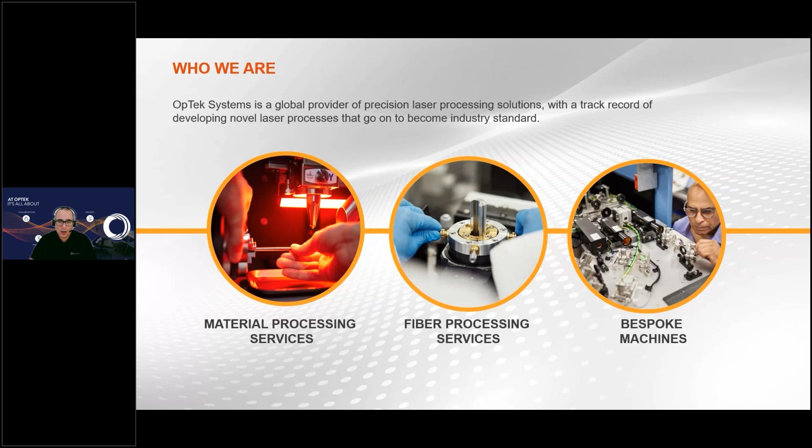I think the next slide really shows some examples of some of our standard laser systems. These range from anything from a desktop type laser marker to slightly larger ribbon strippers through to standalone laser micromachining systems with 5 axis of motion and different laser sources. Indeed, the biggest machine we've ever built has been about 7 tons with 5 different laser sources with sub-micron precision. And the smallest, which we'll talk about later on today, is around about 8 millimeters in size. So hopefully that gives you a full suite of our machine portfolio and the solutions we're able to develop in conjunction with customers like yourself.

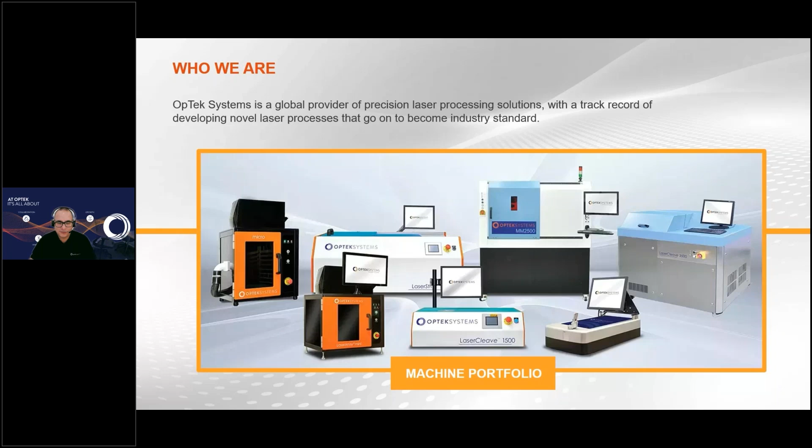I think when we think about these machines, it's also important to think about the industrial context in which we're talking about today. A big thrust of the value we're going to share with you is about how do you address challenges in maintenance and repair. Depending on your industry, they'll be slightly different, but in general, we're seeing lots of interest in people working in very confined spaces, either for people or tools, such as complex aircraft engine geometries, through to very hazardous environments, such as chemical or radioactive energy areas. There's also a lot of concerns around how you do this in an environmentally proper way, to conform with the minimum regulatory pressures, and also to protect your people. I think it goes without saying that the people in your team deserve to go home in the same condition that they arrived, and trying to understand that doing this in the right way also comes along with significant safety benefits, but also financial benefits.

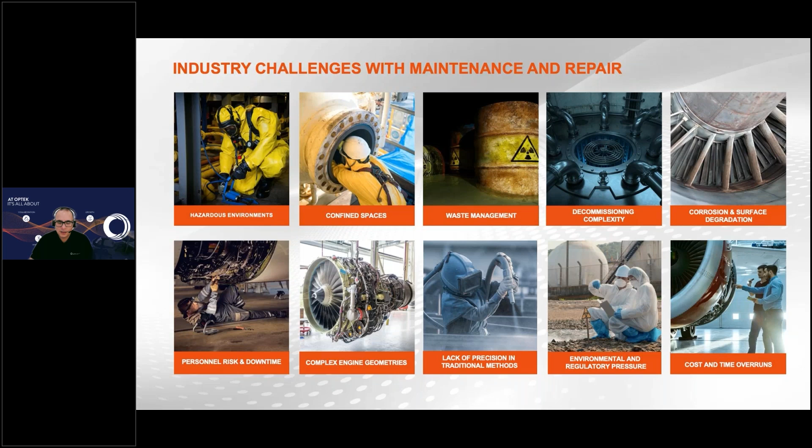And I think when we look at some of the markets where our technology has been deployed on the next slide, you can kind of get a sense of how valuable this can be for you when you're thinking about using lasers in maintenance and repair. So one of the case studies that we work closely with our client was involved how do you do on-wing repairs? To take a big engine off of a civil airliner can cost a lot of money. Any maintenance you do on anything, even outside of aircraft, increases the risk of maintenance associated failures, and a significant amount of money and time goes into the operational maintenance of civil airliners. So anything we can do to help that industry to make that more efficient and safer, this is what you'll learn today.

Moving into energy, a lot of challenges are faced when a nuclear reactor comes to end of life, and it can take over 20 years to decommission a nuclear reactor. The maintenance and repair bill typically is $50 million per year, which is right and proper—you want nuclear facilities to be safe. There's a lot of downtime per year due to this, and if reduced safely, it can be reinvested elsewhere in the business.

From an aerospace and defense perspective, lots of hours are spent on every flight hour for military jets, and a lot of flying days are actually lost during this process. So when you think about the cost per hour, this technology we're going to show you today is a really quick way to keep the aircraft flying more economically and efficiently, and to decommission things in a way that protects your operators while being very precise and targeted.

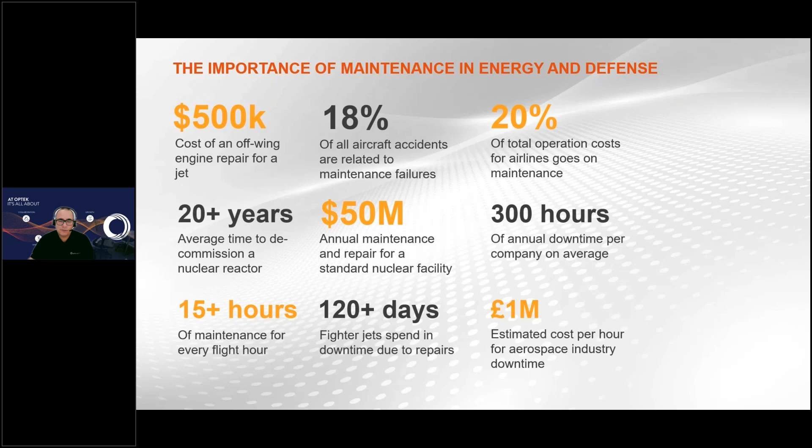Before I introduce my colleague, I wanted to give you a sense of scale. So what have we done? We've adapted over 25 years of learning about laser processing and shrunk that down into an ultra-miniaturized delivery system that can be used safely and remotely in confined spaces. This is how you can navigate curved, shielded spaces and carry out methods such as cleaning, ablation, or inspection tasks safely and precisely.

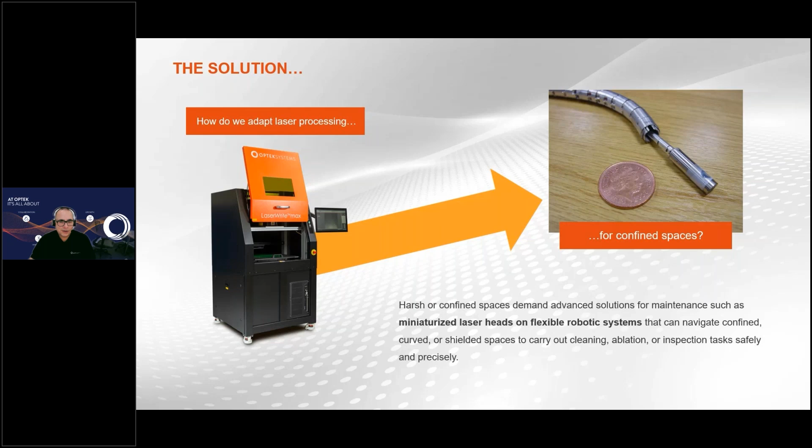Many thanks, Bruce, for that introduction. Just to introduce myself, I'm Mike O'Key, fiber processing manager at OpTek Systems. I've been working in laser processing of optical fibers for quite a few years—processing the fibers themselves for telecoms and medical markets, but also using fibers and launching laser beams down them to do things at the other end. I'm also involved in special projects, unusual projects, and that's really what I'm going to be talking about today.

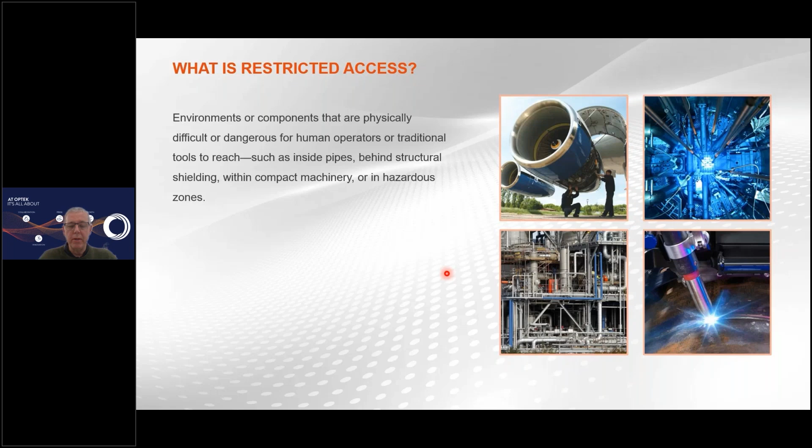So what is restricted access, and what do we think about when we think about restricted access? Well, that can be deep inside a jet engine, a nuclear reactor, or a complex chemical works with a complicated arrangement of pipework. It can be on the shop floor with a difficult-to-access welding or cutting job. These are all areas that involve something of a headache in trying to gain access conventionally.

So taking an aeroplane engine off a wing is very expensive and time consuming. Diving deep into a nuclear reactor is not advisable—again, it's expensive, with safety aspects to consider. So we need a way of accessing these areas remotely, which means we can't really use conventional techniques.

We began looking at this several years ago when a major aerospace civil engine manufacturer came to us with a particular problem to solve, where they needed to get deep inside the compressor blade region of an engine to do some repairs. So we started looking at that for them.

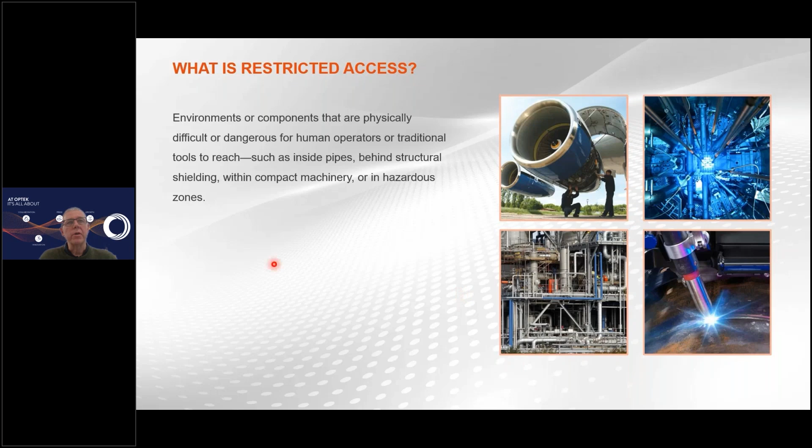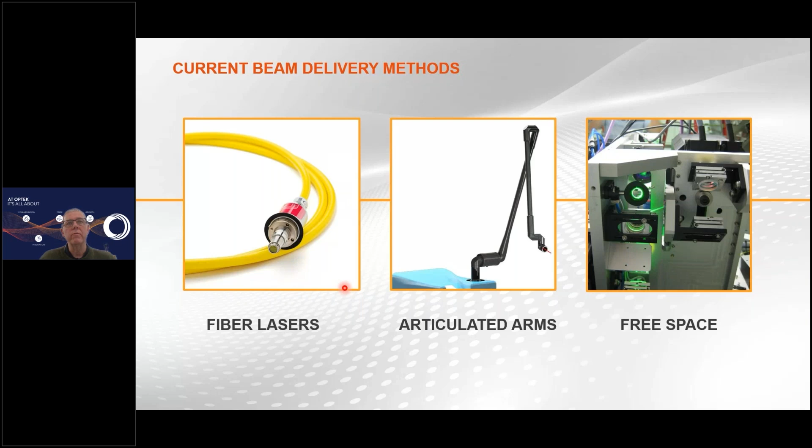And then we've got fiber lasers. Fiber lasers have revolutionized laser processing in the last 15 years. Not only is the laser beam generated inside an optical fiber, it's then launched into the outside world through an optical fiber, enabling a lot of flexibility in what you can do with that beam. But all of these methods of manipulating laser beams are too big and bulky—even fiber lasers, as the standard off-the-shelf fiber laser has a substantial jacket around the fiber, plus a collimator or focusing head on the end. These are just too big for what we want to do. We're looking for something that fits within an 8mm tube, so that really only leaves us with fiber optics again, launching our laser down a fiber optic.

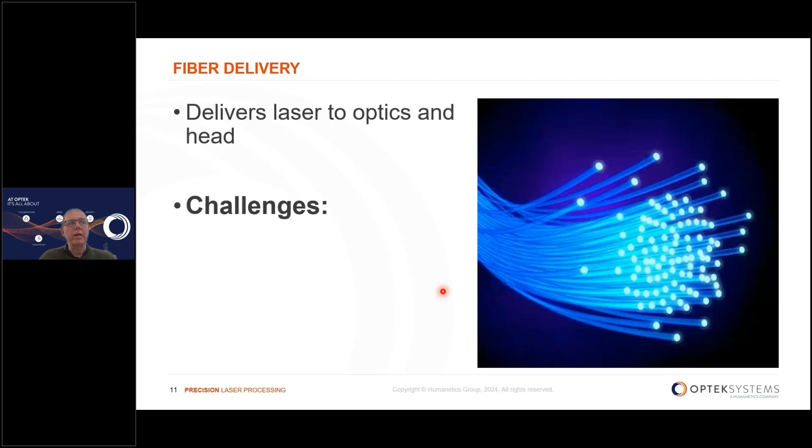A small fiber optic is going to be very flexible, but this comes with challenges. What are the challenges with launching lasers down fiber optics? Well, we know you can get kilowatts down fiber optics—the fiber laser manufacturers do this.

But for our application, that's going to involve complex launching schemes, and in general, the fibers are going to be too large. So to explain this, I want to talk a little bit about fibers themselves. What is a fiber optic?

I'm sure most of you know, but it consists of a core and a cladding of slightly different refractive indices. And because of that difference in refractive index, light entering that core is reflected off the interface and is guided down the core. This can go on for many kilometers.

But in order for that to happen effectively, such that the light is guided in the core and doesn't spill out into the cladding, there is a parameter called the numerical aperture of the fiber. This determines the range of angles you need in order to launch your laser beam into the fiber.

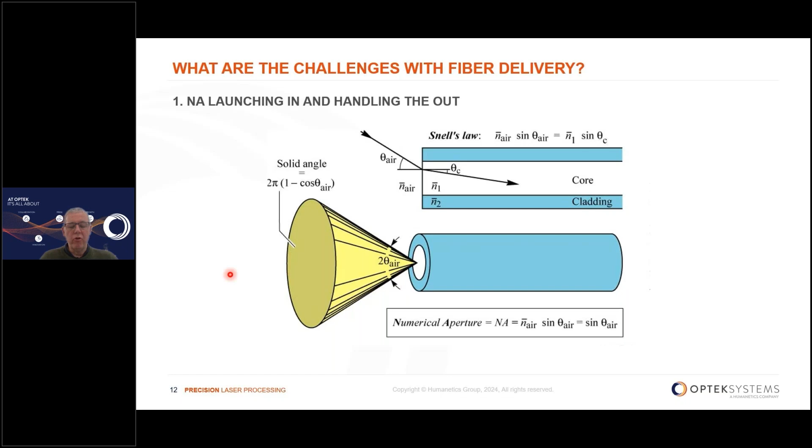Not only do we have this numerical aperture parameter, but the core diameter is also important. For small core diameters, single mode fibers, this maintains very good beam quality. As your core diameter increases, your fiber becomes increasingly multimode, which degrades beam quality. So there's a trade-off between the core size, what you want to do at the other end, your beam quality, and your launching optics to effectively keep your beam within this numerical aperture value. The trade-off is required to do this effectively.

Likewise, at the other end, the light coming out the end of the fiber is also determined by this numerical aperture parameter. In fact, it's the same - the spread of light coming out the end of your fiber in general is the same as the criteria for launching light into the fiber.

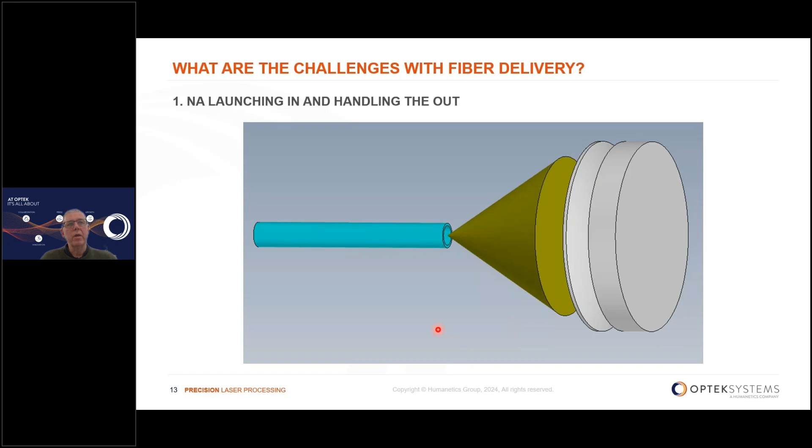As the light spreads from the end of the fiber, it's then got to be managed somehow. If we're talking about using an 8mm diameter head, this squeezes everything down and makes the optics small. It also means we have to have some control over this spread of the light coming out the end of the fiber. We can't allow it to expand too much, and then we've got to be careful of damaging our optics.

So what we've got to ensure is that the optics are clean, and that they have good quality coatings on them. We can limit the amount of average power we're putting down by duty cycling the power, and we can also introduce cooling into the system.

So once we've launched the light down our fiber, we've selected our fiber to maintain good beam quality and be able to launch the amount of power we need to do materials processing. Once we've done that and have an arrangement of optics at the end of the fiber that can capture that light within the small radius we want, then we need to think about how we're going to manipulate that beam.

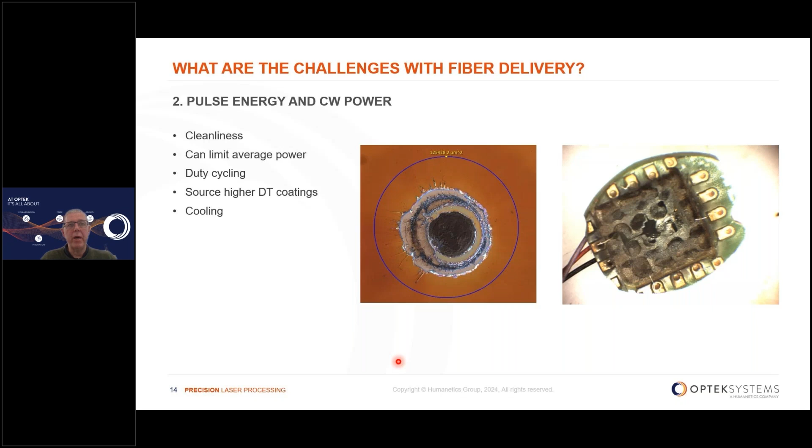It's not really much use coming out the end of the fiber and not being able to do anything with it. We need to be able to move that around. So what are the current techniques of moving a laser beam around?

First of all, we have galvanometer scanners, very widely used in the laser industry, and we use them here at OpTek in our systems all the time. They involve using two mirrors mounted orthogonally, which move the beam in X and Y. They can move the beam very quickly and very precisely. But galvanometer scanners generally are the size of a box of tissues - the smallest ones available on the market are still too large for what we want to do, generally still sort of 60 millimeter cubes.

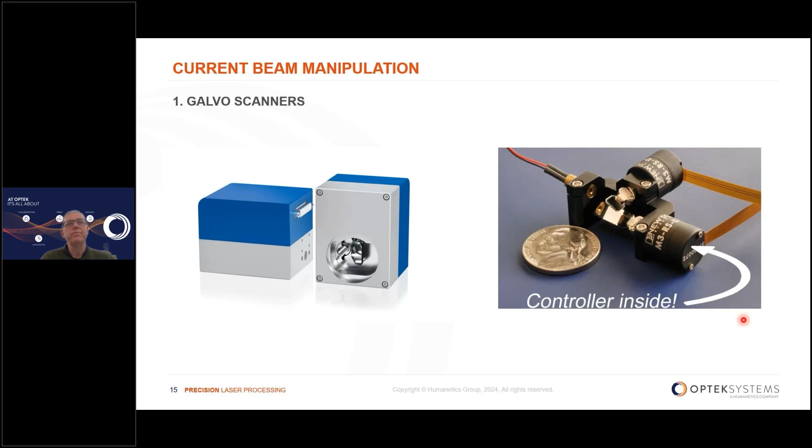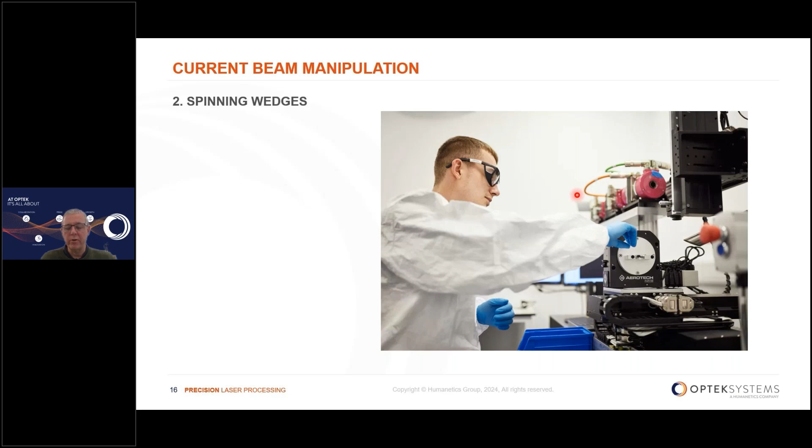As well as galvo scanners, we can use spinning wedges or Risley prisms. Again, this is something we do at OpTek all the time when doing precise drilling. The prisms in this image are mounted in these pink circular motors, which just give you an idea of the size of the hardware required here. Again, this is something just too big, too bulky - we can't use those in what we're trying to do. We also need to think about the geometry of what we're trying to do here.

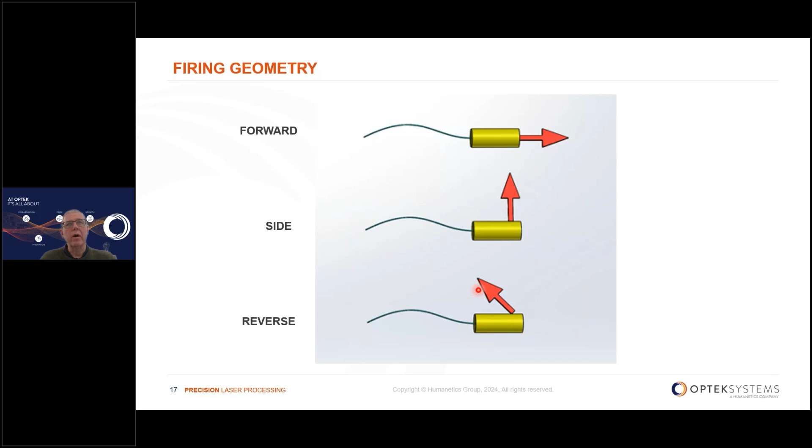So, do we want the beam to come out the front, or do we want it to come out at 90 degrees to the head, or does it need to come back on itself? So, like I said, a number of years ago, this engine manufacturer came to us with this particular problem.

We then worked with a MEMS manufacturer, which is a micro electromechanical system. In a MEMS device, this is a moving mechanical system that's literally etched onto a chip. All the moving actuators are actually etched into the silicon chip itself. Here is an image of the device that we actually use. The mirror here is only 3 millimeters diameter, elliptical, 3 millimeters across the long axis. So that gives you an idea of the scale we're dealing with here.

The selection of the mirror was also critical, and there was quite a lot of development went into that. Not only does it need to be massive enough that it can handle the laser powers we're dealing with, it also needs to be thin enough that it can be supported on the MEMS structure underneath without breaking that structure or affecting its performance. So in the end, we have an elliptical mirror, 3 millimeters along the long axis, but only 50 microns thick, silicon with a high reflective coating on it. And we demonstrated in excess of 50 watts average power reflected from this.

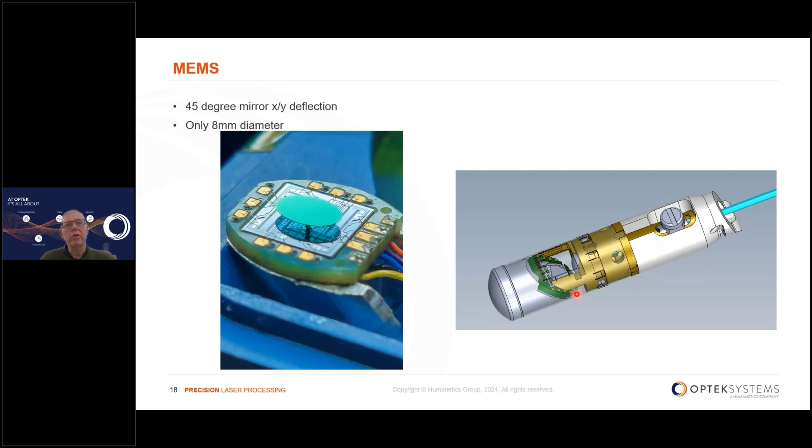On the right, we can see a schematic of the 8 millimeter diameter head incorporating this MEMS mirror arrangement. Here, this is the fiber coming in, and inside we've got collimation and focusing optics. This video is showing the MEMS actually moving, and this is an early prototype version with a circular aluminium mirror. We're able to get deflections of around plus or minus 5 degrees, which is sufficient for what we're trying to do.

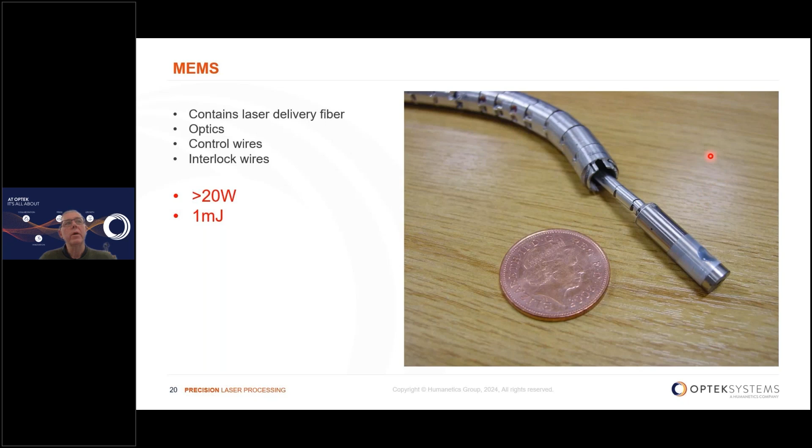And we were able to demonstrate this to greater than 20 watts, 1 millijoule of nanosecond laser pulses. The head, the arm, also contains the control wires for the MEMS device itself and interlock wires.

So all of these things are tested and developed in the laboratory environment, and here you can see the MEMS head that I've just shown on the previous slide. The orange part here is the fiber optic delivering the beam, and it's just performing a machining process there on a compressor blade.

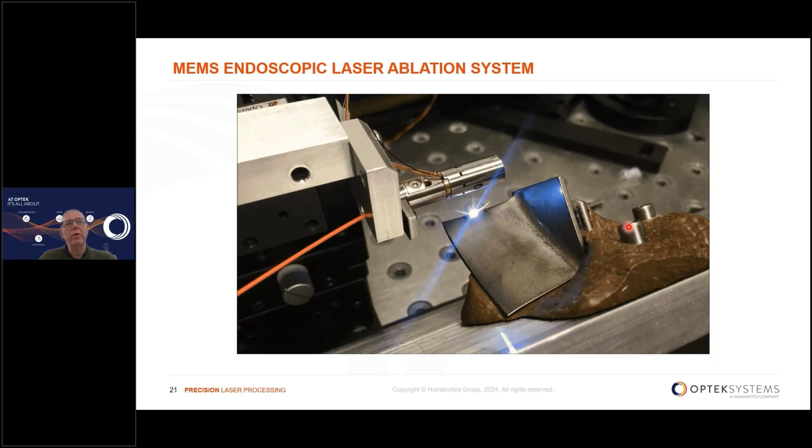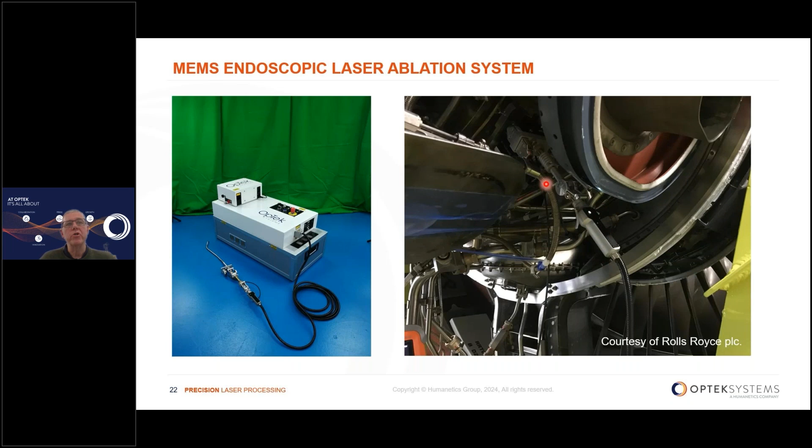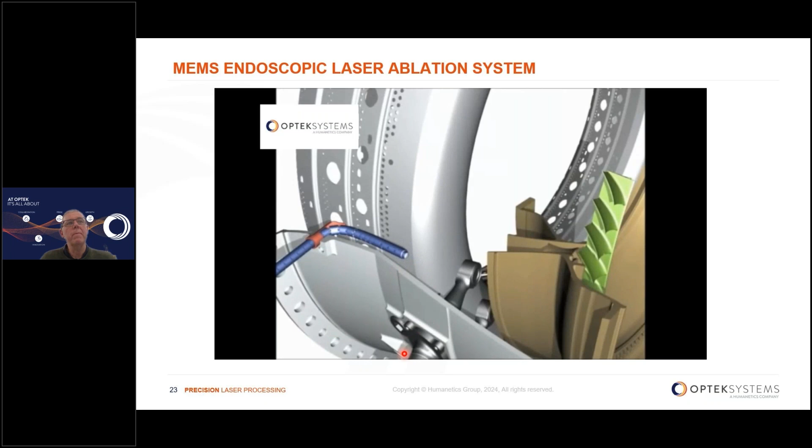And when it was deployed, we'll show you a video of part of this that's animated. This is how it's introduced into the engine. It's got to navigate around a few corners and a few tight spaces until it gets to a final resting place between two blades.

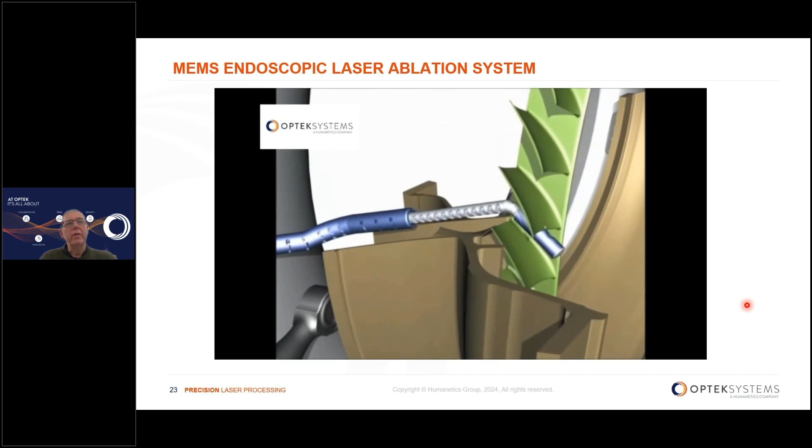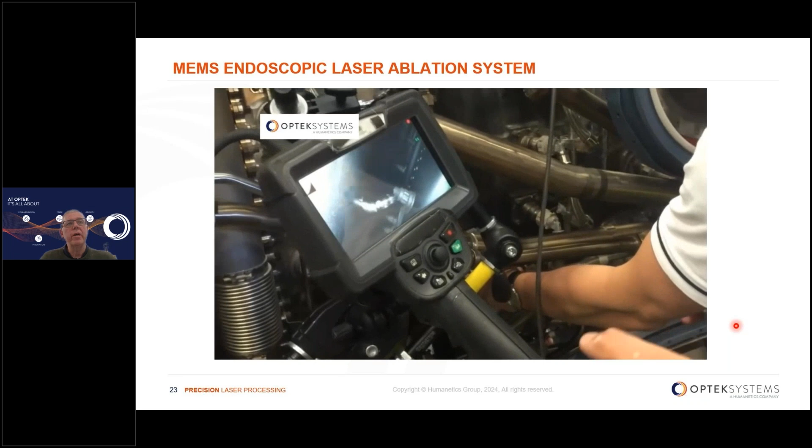And there, I think the video will then switch to the actual footage. A bit of a simulation of the laser beam there. And then we're going to the actual footage where the engineer's introducing this into the engine. There's also a borescope camera in there to help him guide it to the point where it needs to be.

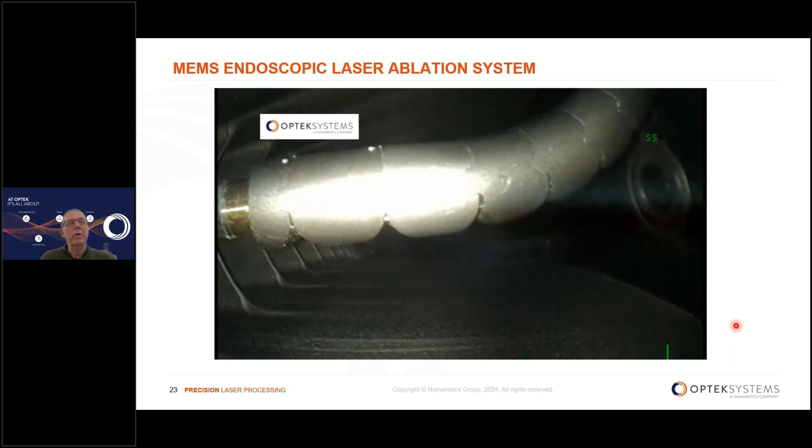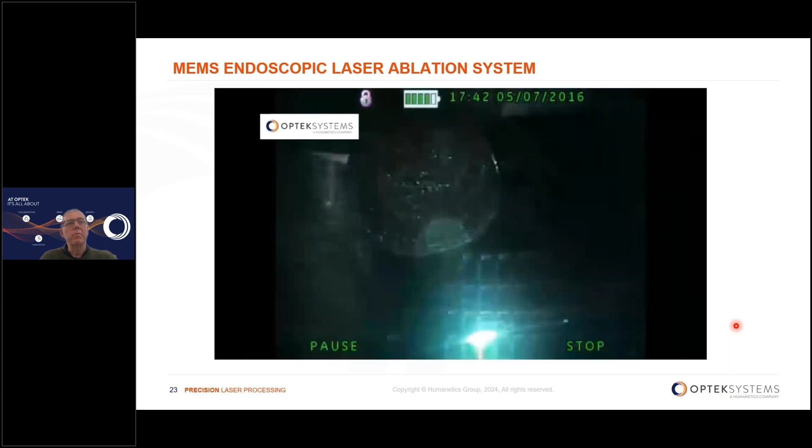And there's the head. It'll emerge from the outer articulated segmented section. There it is in place, and there it is actually performing some materials processing on the edge of that compressor blade. And this is actually for a live engine repair, to actually blend away a small crack in that blade.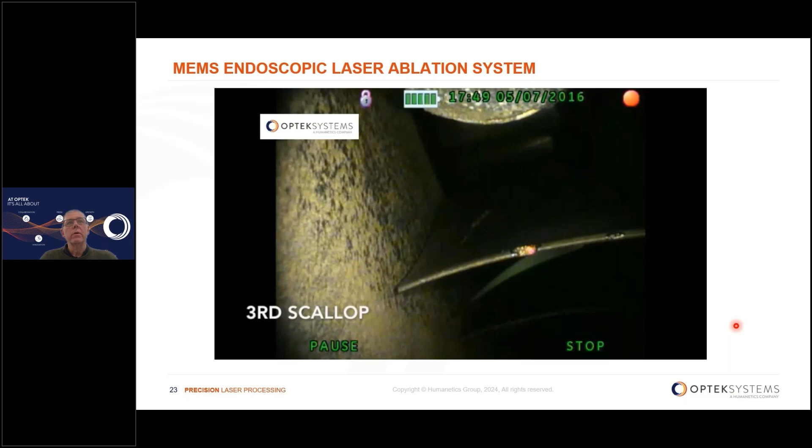So I talked about that being a manually deployed system. Well, this particular technology is obviously well suited to robot deployment, and that formed a collaborative project that OpTek was involved in with the University of Nottingham, Rolls-Royce, and UKAEA Race. This was called COBRA, which was Continuum Robot for Remote Applications.

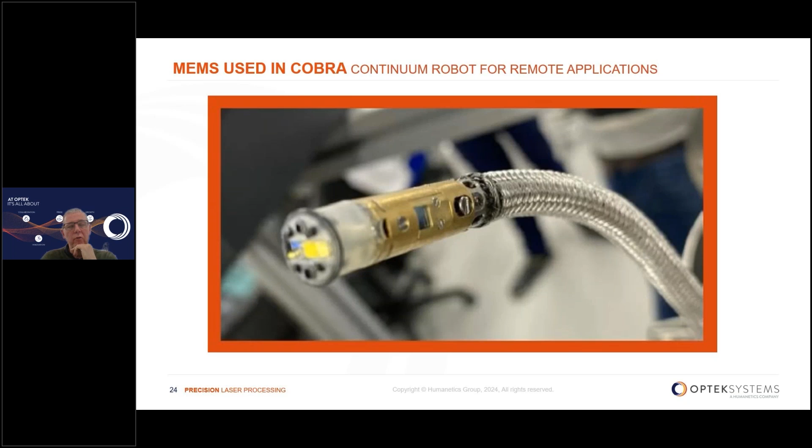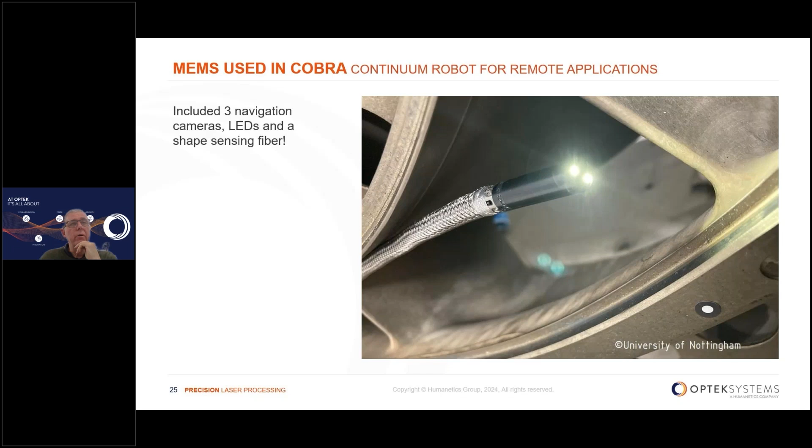This involved mounting the laser head on a continuum robot, or a snake robot. In this particular case, we had the luxury of increasing the diameter to 9 millimeters, so a 1 millimeter increase in diameter. But that did enable us then to include navigation cameras, illumination LEDs, and even a shape sensing fiber.

That system was then incorporated into a little portable unit. You can see here we've got the control laptop on the left, which contains the mechanics and electrics of the control of the continuum robot itself. We have a joystick control mechanism, and then the interface here for the engine.

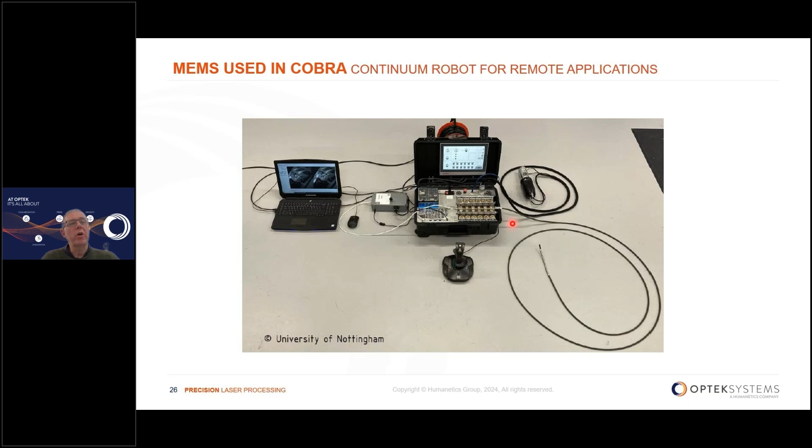So the MEMS technique is great, and it enables us to shrink things down and manipulate a laser beam in a very small format. Because of the nature of what a MEMS device is, it's etched onto a piece of silicon. Under certain circumstances, in certain deployments, it's probably not going to be terribly robust. And for that, really, we need to look at another technique.

So here we looked at shrinking down the spinning wedges technology that I showed you in a previous slide, to about 8 millimeters. But initially, we shrunk this down to 12 millimeters. And so we're using now transmissive optics, so there's no stringent requirement on the performance of a mirror as such, which means now that we can potentially use higher powers.

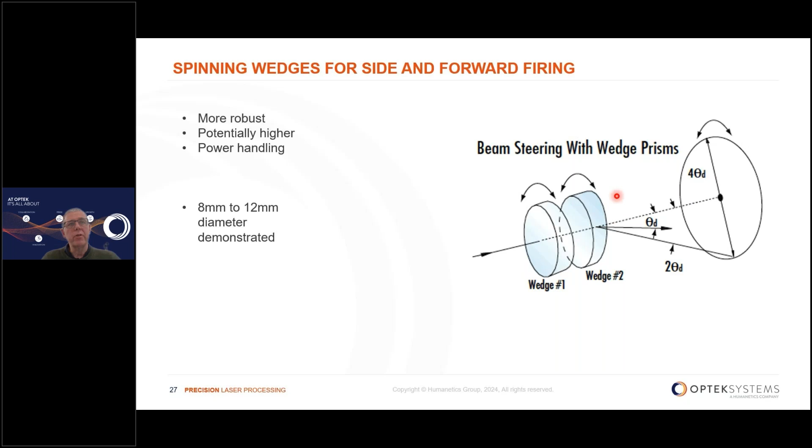If we use one optical wedge and we spin that wedge, we're going to transcribe just a circle. If we use two wedges and we spin them at slightly different speeds, then that circle will move in and out and change diameter, and that gives us a way of laser machining, removing material in a controlled way. And if you synchronize these wedges in other ways, the phasing of these wedges, then you can produce other shapes.

So we took this technology and shrunk it down to a 12 millimeter diameter for another in-engine repair activity. Again, the blue rod here is the fiber coming in, and we've got two micro motors, the smallest commercially available motors you can actually get. In the center section here are some gear wheels and also mounted the optical wedges.

The beam exits off a high reflector through a focusing lens and 90 degrees out the side of the device. This could be configured also for forward firing, fairly straightforward. The other thing we've got on here is a fairly rudimentary homemade encoder system.

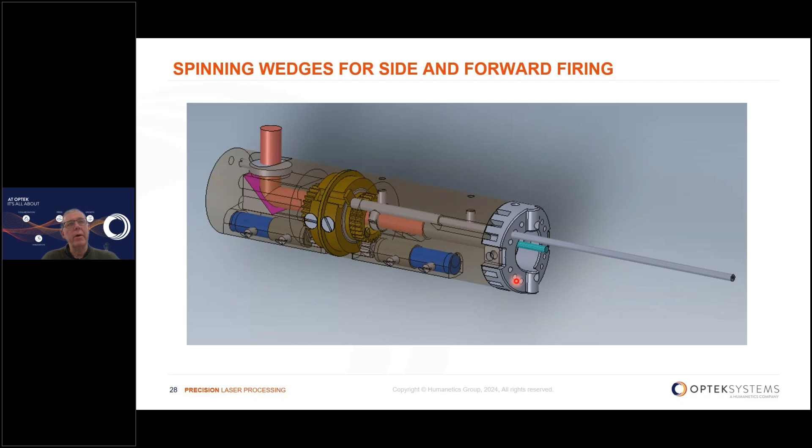These motors are too small to have their own encoders, so we developed an encoder system using a transmit receive fiber optic that looked at rotating flags, for both wedges individually. With that technique, we were then able to control the laser power. As that circle changed its diameter, we could control the laser power and synchronize the laser with the rotation of the wedges.

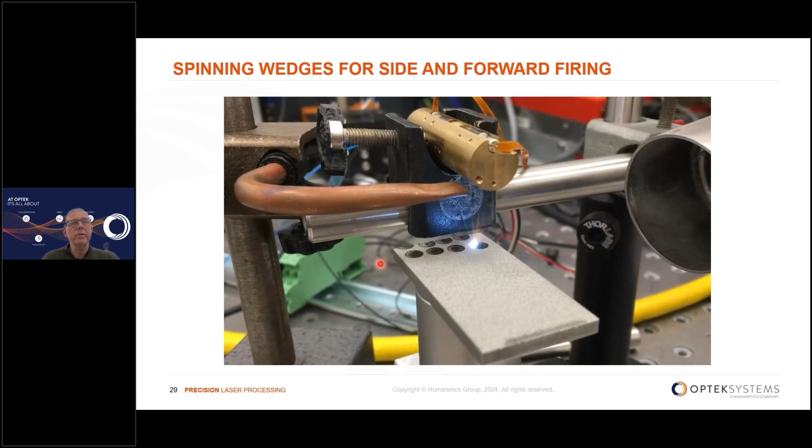So here, again, tested in the laboratory on a piece of sample material, we're actually removing ceramic from a metallic surface. This is the 12 millimeter diameter head, delivering about 20 watts of laser power to the surface here.

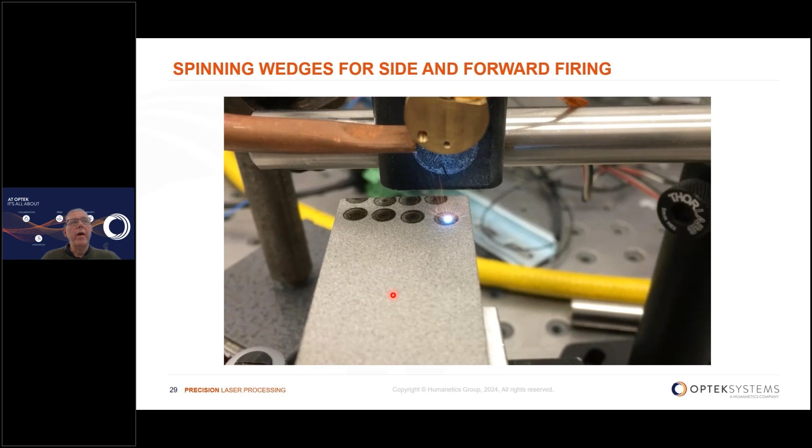And then what can you do with that? Well, that processing area, if you want to increase it, you can tessellate these circles, and so this is about a 25 mil by 25 mil area of removed material. The cross section on the right shows you the control we can get with this system.

So here we have the substrate material. There is an intermediate metallic layer and then the top ceramic layer. In this particular application, it was important that the ceramic was removed, but the metallic layer, this intermediate layer, was kept intact. So with this control of the laser power and other parameters, we were able to do that.

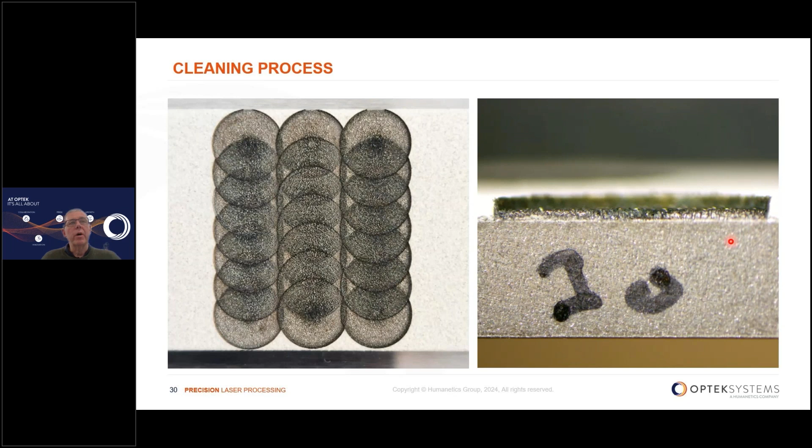And so again, this was mounted on a continuum robot up at the University of Nottingham and deployed inside a test combustion chamber. This video just shows you that process happening.

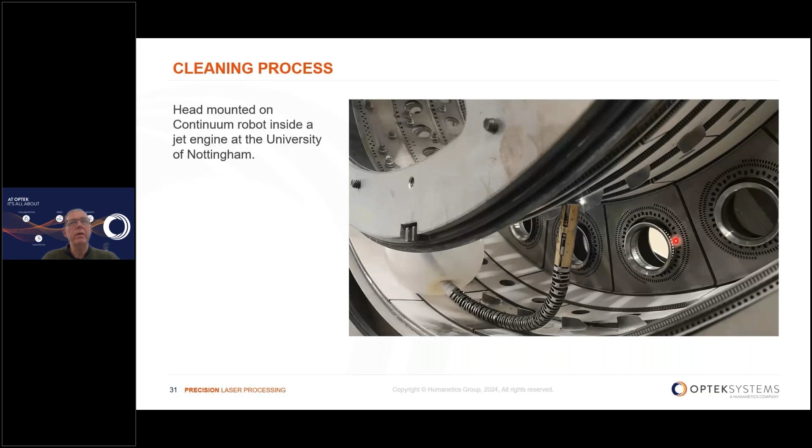And then we've got here some other applications. Using the same bit of kit, we have removed a sort of horrible organic substance from the inside of an aluminium container. And then on the right, we have another video of a deployment up at Tharsus Limited, again inside a jet engine there.

You can see that even with this curved geometry, the head is here at a slightly odd angle. Even with this curved geometry, it's dealing with that and managing to remove material fairly evenly over the area that it's actually removing.

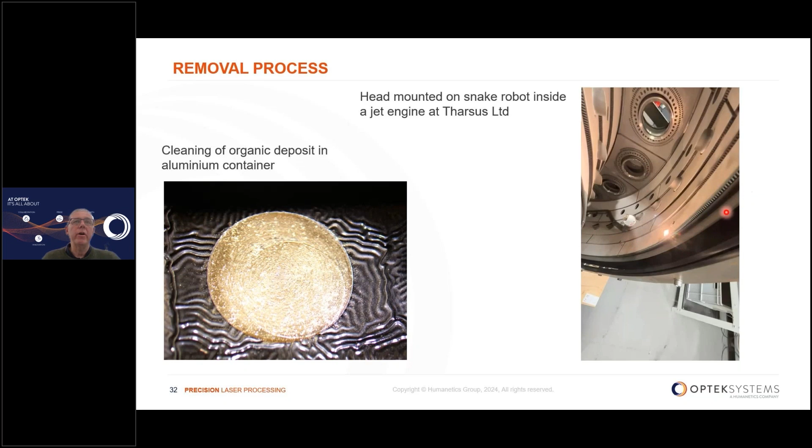So that 12 millimeter head, we were able to shrink down further to the 8 millimeter diameter, the original requirement that was presented to us. And this shows the edge of a compressor blade where we've removed material using the spinning wedges.

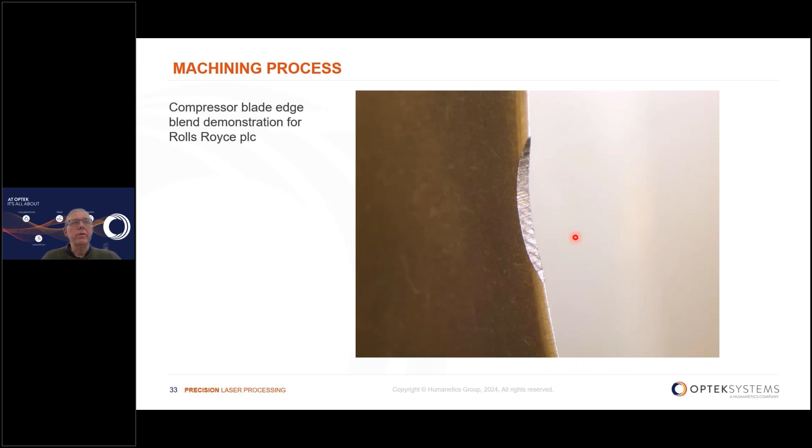The important thing here is that the surface quality is good and that we don't introduce any more stresses in that blade from poor surface quality. These blades have been tested and they all meet the acceptable standard.

So what about further development of the spinning wedge technology? We've taken it down to 8 millimeters, probably close to the smallest size, maybe a bit smaller. But we can certainly scale this upwards fairly readily, up to 25 millimeters, maybe a bit more. Anything bigger than that is probably getting into the regime of systems that are already out there for this sort of work.

With scaling, we can scale the laser power, delivering more power down this system. If we make it bigger, we can make the fiber bigger, make the optics bigger, to avoid damage to the optics. We're looking at cooling, possibly using compressed air launched up to the head, and we're improving the control system to get better synchronization of the wedges.

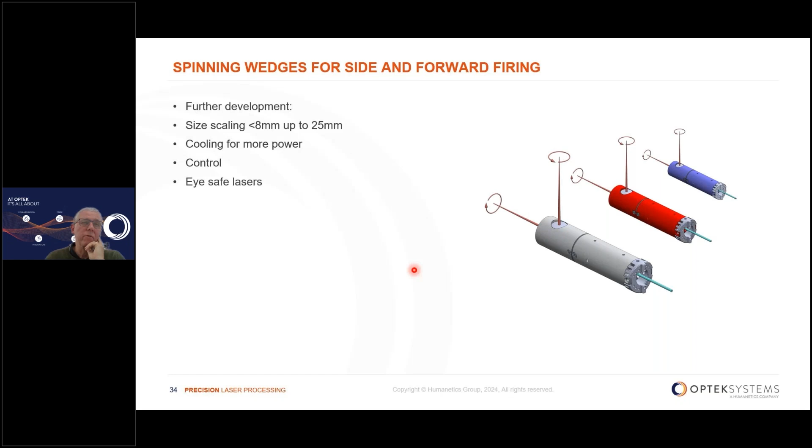Other things we're looking at, which apply both to this and to the MEMS device, are eye-safe lasers. There's no such thing really as a truly eye-safe laser, but we're looking at alternative laser sources so that the requirements can be relaxed in terms of laser safety for where these things can be deployed.

In summary, I've talked about two techniques for manipulating laser beams within a very small volume for accessing restricted areas or restricted access applications. One technique uses a MEMS system with a small mirror mounted on it. The other uses two rotating wedges, and that's it.

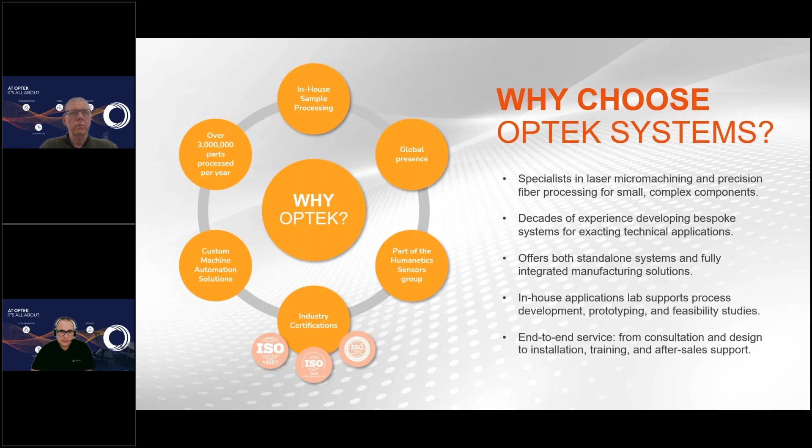Finally, the businesses all have significant industry certifications. As you'd expect, ISO 9001, and we're committed to working in an environmentally responsible manner, so ISO 14001. Recently our UK and Chinese sites achieved ISO 13485 certification for medical applications. So from an end-to-end point of view, we're here to help you. We're really interested in taking this technology forwards and creating value in the industries.